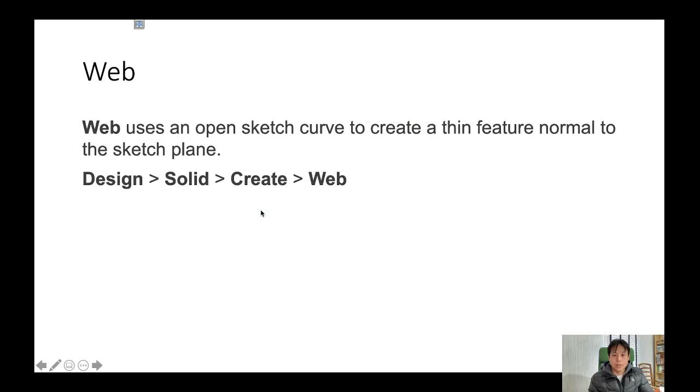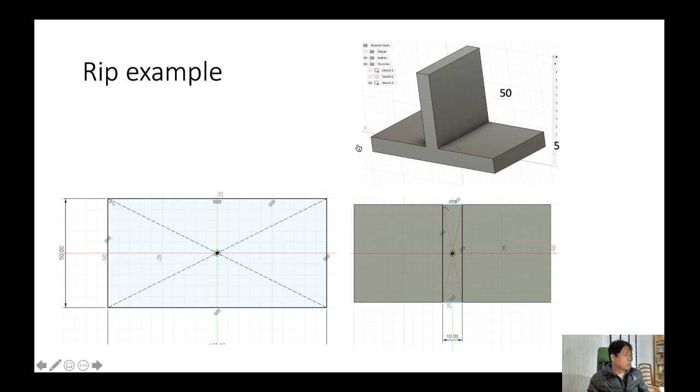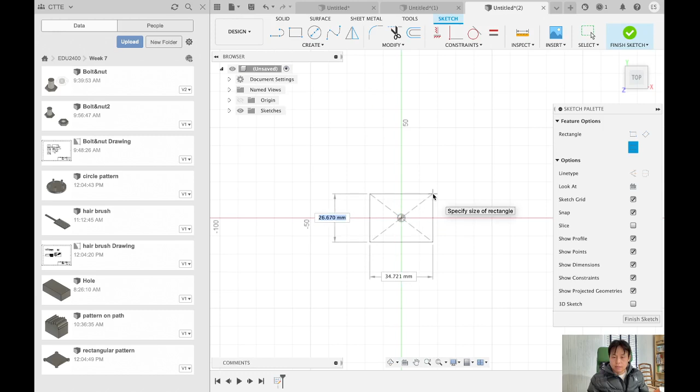So let me create this rib in Fusion 360. I'm going to start a new canvas, create a rectangle on the XZ plane. I'll use a center rectangle - there are important reasons I'll explain a little later. It starts from the center of the origin, and the size was 50 by 100.

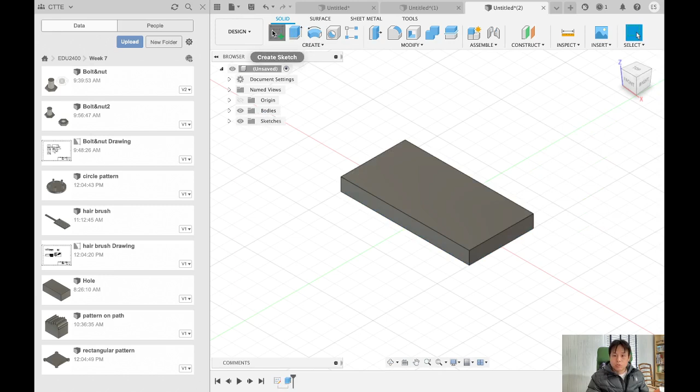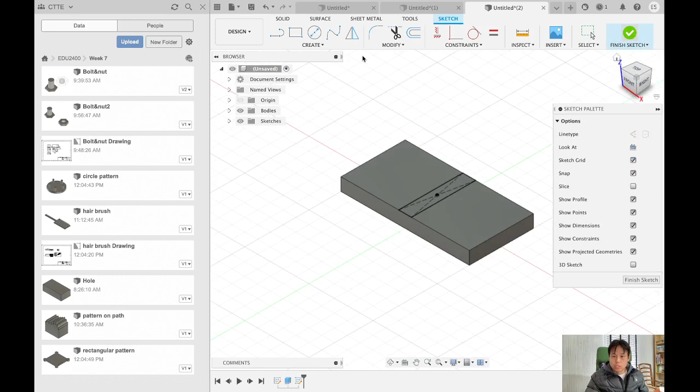All right, finish sketch, and then extrude this one - let's say 10. I'm going to change my sketch to 10, and then draw another sketch on top of this plane. I'll also use a center rectangle from the center, with size 50 by 10. Finish sketch and extrude that object by 50.

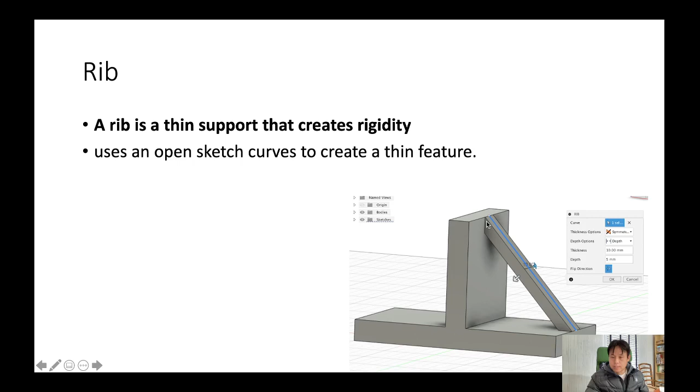All right, so I'm ready to create the rib. To make a rib, we need to have a center guideline like this. I'm going to draw a line from the center of this line to the center of this other line - they should both be centers of their lines. That's why I used the center rectangle.

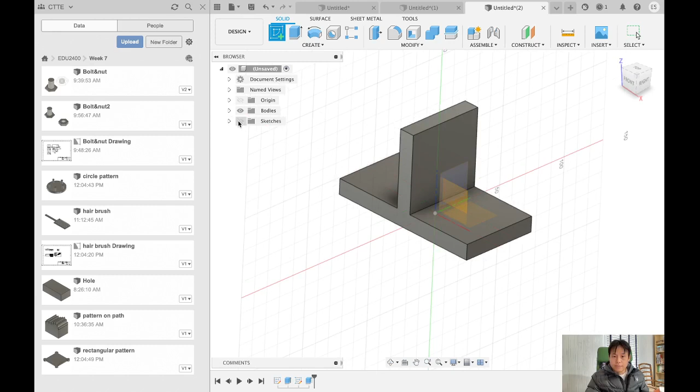I'm going to create a new sketch using this XY plane. You should be very careful to select the XY plane. If you cannot select the origin plane, you can make your body invisible, and then you can select the XY plane. Click this one.

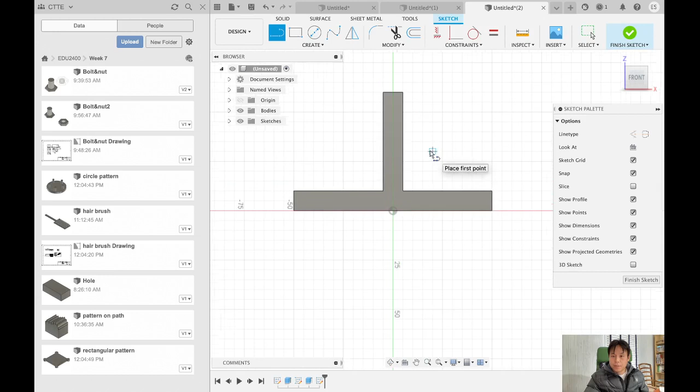Okay, and I can draw a line. I find the end point, the edge point. If you cannot find the edge, you can zoom up to find it. So select and connect to the edge, then finish sketch.

All right, let's see - I click the house button on the view cube, and see, I drew this line. You should be careful: the line should go from the center of this line to the center of this line. Okay, and let's use the rib.

So go to Create and then select Rib. The dialog is pretty simple - the curve is the line, click that. Then we can select the thickness and depth.

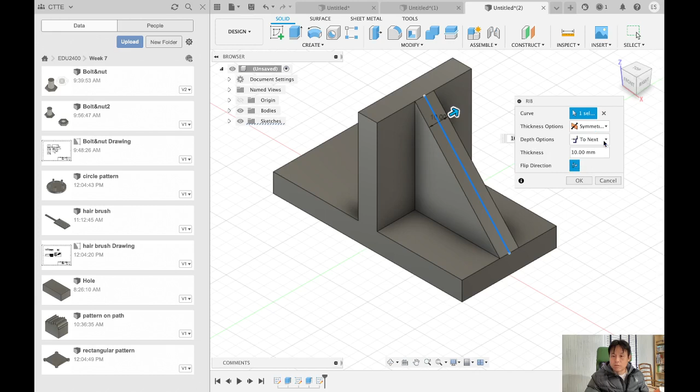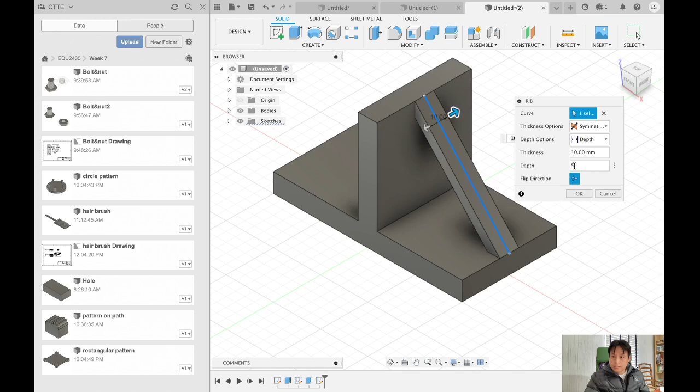If I click the depth option, there are two choices: to the next, or depth. If you click to the next, the line goes to the object, like this. But if you click depth, you won't see anything yet because you haven't set the depth, so you can set depth to 5 millimeters. Then click, and see the depth of 5. We can change the depth like this.

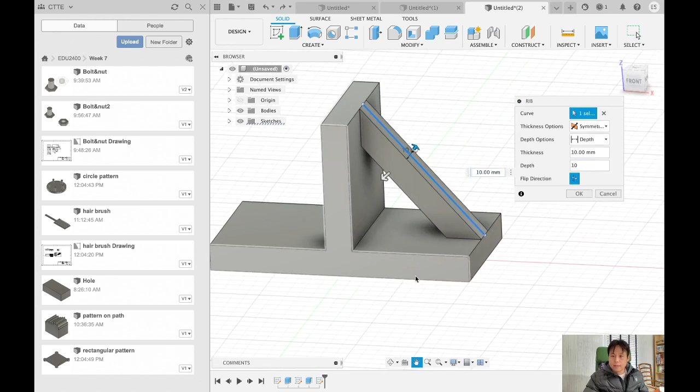Let's try another rib. I did undo, then click rib, click the curve, and set depth - I'll say 10. There are also thickness options.

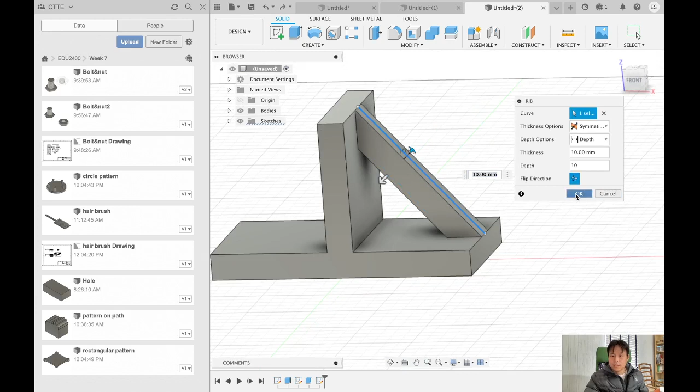I select symmetric. If you click one direction, it creates material only in one direction from the line, but symmetric creates both. You can also change the flip direction. But we want to put it inside the two objects. Click, and we create the rib - that's the rib application.